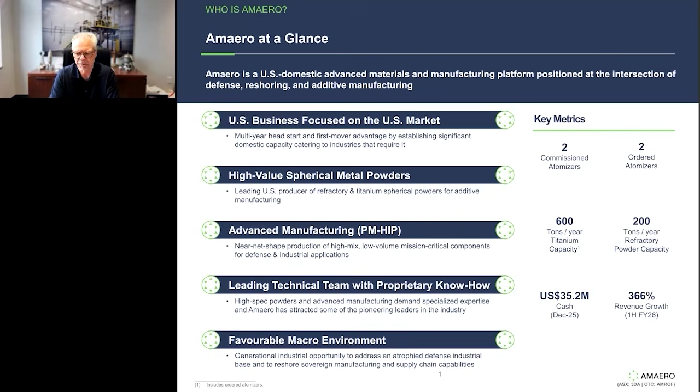And we also have pioneering experience in PM-HIP manufacturing of near net shaped parts. A very important capability that is relieving strain in the large castings and large forgings ecosystem. As you will see, we have assembled a leading technical team in the US, have significant proprietary know-how, and again, have very favorable thematic tailwinds that are behind us.

A bit about the overview of the business, again, both on the advanced materials side and the advanced manufacturing side. Advanced materials, as many of you may well know, 3D printing or additive manufacturing. The source, if you will, the feedstock is powder. Think of this as the ink cartridge in your HP printer. Again, the spherical powders are the cartridge, if you will, or the input that is used in additive manufacture or 3D printing.

About 80% of that powder market is what we would think of as commodity alloys, stainless steel, nickels, coppers, such as that. The top 20% of the market, lower volume, higher value, are refractory alloys, such as niobium, tungsten, tantalum, moly, zirconium, and then titanium. Titanium being the largest part of that market. That is exclusively where Amaero focuses.

We have the most advanced technology in the world, the next generation of an EIGA, or electrode induction gas atomizer. We have what's called the EIGA Premium. Significantly higher yield than the prior generation, uses less argon gas, which is the second largest consumable. And again, very, very high quality powder.

The two most accepted manners of atomization are plasma atomization, used by companies such as AP&C and Tekna, and gas atomization, used by companies such as Amaero and the prior generation ATI in the US. These additive manufacturing or 3D printing applications are used extensively in defense, space, medical, and other industrial end markets.

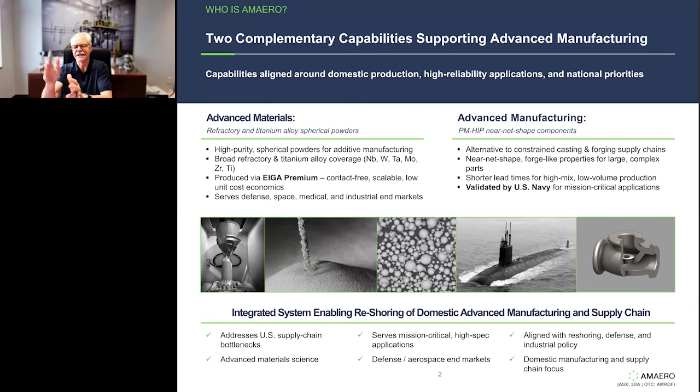We've worked very closely with the US Navy. You'll see in a bit validation of that via a letter from the US Navy, as well as an event that was convened at Amaero back in December. And PM-HIP is particularly well suited for what we call high mix, low volume production. So if you've got a single part of which 1,000 will be manufactured, it makes sense to invest in investment tooling and so forth. But if you've got a part of which you might only need a dozen in a single year, but again, mission critical, high value parts, PM-HIP is fantastic for that type of application.

Very interesting leadership team. One of the things that is unique about Amaero, I'm an engineer by background. I've spent my entire career in private equity and finance. My private equity firm Pegasus owns about 30% of Amaero. I have personally funded about half of that position. Again, very unique alignment of interest with our other shareholders. We own 288 million shares of Amaero.

Every single share of that stock was paid for alongside other investors in placements or on-market or off-market activity. Very different than, candidly, I see with many ASX companies where CEOs or management are given significant stock in the way of performance rights or other grants. Again, in this case, all of our shares were paid for alongside other investors. We've assembled the leading technical team in the U.S. Thus, the reason we work so closely with U.S.

...labs and other defense primes and counterparts in the U.S. As I mentioned, we're now in a fully built out 100,000 square foot facility near Chattanooga. We fully commissioned our equipment, and just this year we have begun scaling from a commercial standpoint. I'll move somewhat quickly through these early slides, and then towards the back of the presentation, focus a bit more on the business in its current state, growth opportunities, and a business update.

Significant thematic tailwinds, and these are primarily twofold. Those of you that follow the U.S. market, as you know, there is a significant uptick in spending on the defense industrial base. Prior to the current Trump administration, the U.S. was spending at a trough level, as a percent of GDP, on defense since the Second World War. The same was true with our NATO allies.

We've seen a significant uptick in U.S. spending as a percent of GDP. And as you're well aware, our NATO allies have also committed to spend much more on defense. This has resulted in expansion of, candidly, what were already atrophied defense industrial base capabilities, where we're having to significantly address resiliency issues in the U.S., single point of failure issues in the U.S., and scale this capability.

At the very same time, on the right-hand side of this page, the Trump administration has had significant policy initiatives aimed at attracting the reshoring of sovereign manufacturing and supply chain capabilities. You've seen in the news companies such as Apple, NVIDIA, the chip manufacturers, medical companies, and so forth, that are trying to better align their manufacturing and supply chain footprint with their end market, the end market being primarily focused in the US.

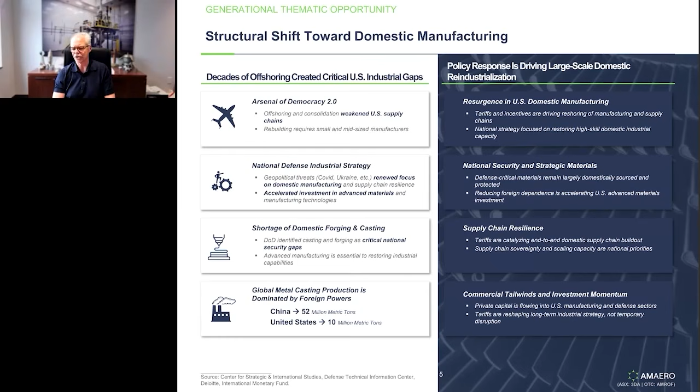This is driving significant interest by large multinational companies, particularly US-based multinationals, that are bringing that manufacturing and supply chain back home. And this has been a significant tailwind for Amaero. Amaero's entire corporate strategy has been driven by addressing demand pull or key vulnerabilities in the supply chain. In many cases, either we are a sole supplier or we have but one or two primary competitors.

On the titanium side, we have two primary competitors, both of which use what's called plasma atomization, both of which happen to be based in Canada, AP&C and Tekna, and that is it. So again, very limited competition on the refractory and the titanium spherical powder side of our business.

Why additive manufacturing? I suspect this is known to many of you, but if you look at traditional legacy manufacturing, whether that's machining parts, castings, forgings, one of the real benefits of additive is this thing known as a buy to fly ratio. So if you were to machine a 1 kilogram part, you might need to buy 20 kilograms of material. That is a buy to fly ratio of 20 times, given all the waste and scrap as you machine and process that part. In the case of additive manufacturing, the buy to fly is about 1.05 times. So very little waste, much more efficient use of material. This is particularly important for these more expensive materials.

Likewise, reduced time to production. An amazing statistic: SpaceX, as many of you will know, currently is launching about once a month. On average, between launches, they are making about 20 design changes. This is only enabled because they print a lot of their parts. You can change your CAD or design file, in turn change your print, and quickly iterate these design changes.

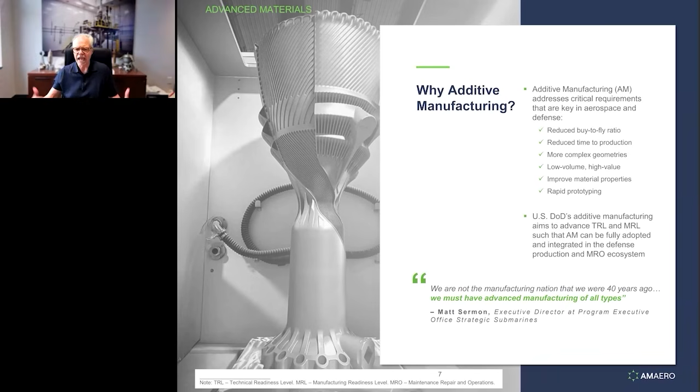Likewise, this makes for lower volume, higher value parts. Think about rocket thrusters, nozzles, and so forth. Again, back to the case of SpaceX. You've got advanced TRL and MRL, or technical readiness level, manufacturing readiness level. And as Matt Sermon, who heads up the program executive for the submarine industrial base, notes, this is significant. And now we've begun to move additive from prototyping work into production.

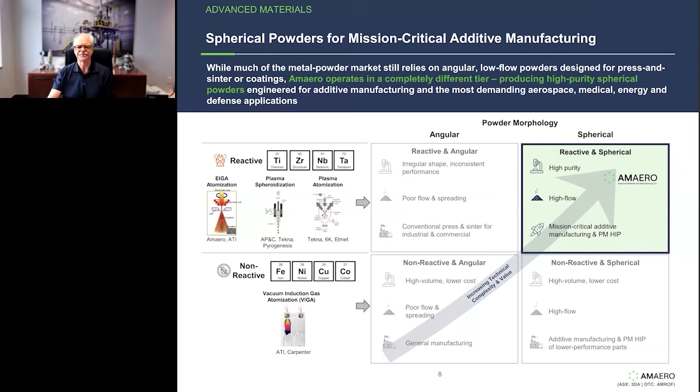Again, very important. Where we sit, as I described before, is spherical powder as opposed to lower value angular powder, an important distinction. And we are dealing with reactive metals such as the refractory and titanium metals, as opposed to the more commodity non-reactive side. So spherical powder, reactive powder, highest value within the powder supply chain. Albeit we purchased our atomizer, the EIGA Premium, from a company in Germany called ALD, we have very significant proprietary know-how.

On the left, what you see is the powder that was produced when we accepted our atomizer from ALD, and they would tell you this was the best titanium powder they'd ever printed. On the right, you see our commercially viable powder. This is after making modifications both to the atomizer itself, as well as significant parameter improvements on our team.

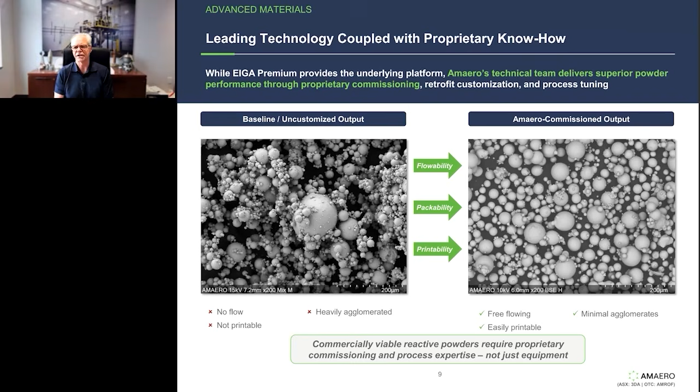As I mentioned, Fred Yolton, who invented gas atomization of titanium 35 years ago, and Eric Bono, who's worked with him for 30 years. So very significant proprietary know-how on our team. The same is true on PM HIP manufacturing, where our team has done a lot of the key pioneering work over the last 2 decades.

On the PM HIP side, the real challenge that we have now is in forgings and castings. One of Matt's favorite charts, who I mentioned again is quoted on the bottom of this page, is a chart that shows the lower 48 of the US, and it's aligned with 48 nodes. His point is, my average part for the Navy takes me 28 months to manufacture. 19 of those months it's waiting in queue, and it's traveling 48 places in the US for various processes. We've got to find a way to shorten that production process.

PM HIP, again, you'll see a letter here momentarily from the Navy, is one of the only mature technologies that can be immediately inserted, and that we can qualify parts for nuclear submarines with this technology. So again, a significant advancement there. These are very, very large parts, far too large to be printed, by way of example. And so you're talking about parts that are 5 tons, 10 tons. Again, much, much larger parts.

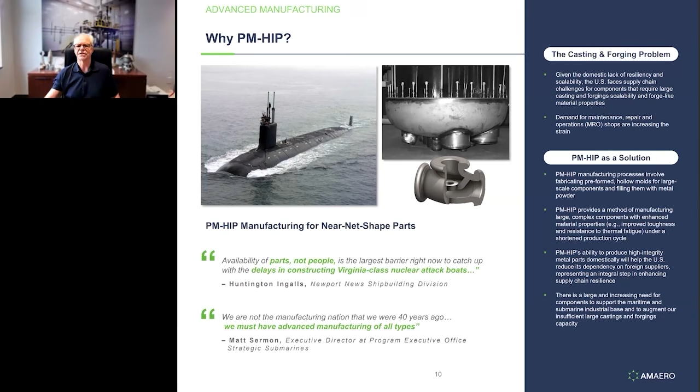And you can think about various industries, whether it is the maritime industry, whether it is nuclear energy. Obviously, nuclear energy is very important in the US. We all talk about AI. AI is driving the data centers. Data centers require a lot of energy. And so you're seeing nuclear modular reactors and other things being advanced in the US. And again, PM HIP is a great technology for that.

In particular for PM HIP, where it's the right choice is where you have very long lead times for forgings. You do get material properties that are forging-like, so much higher material properties than castings. Again, large parts where you typically would have excessive machine waste. So these are ideal parts for PM HIP. And as I said, these can be very, very large, commonly 10 tons, and very large in size, up to about 60 inches in diameter.

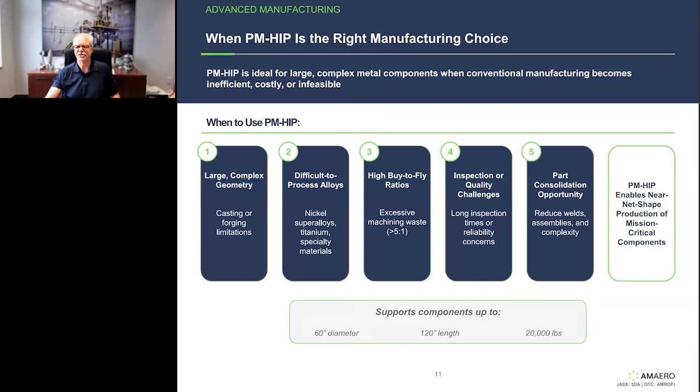This gives you a sense of where we sit. We've got proprietary know-how from the very beginning. So a very advanced numerical model that is used to design the can or the canister, essentially the mold. These molds are then filled with powder, outgassed. We then send these away to be HIP, hot isostatic pressed. So you're putting this under very high temperature, very high pressure. And then in turn, from the near net shape, you've got final machining that is done to get to the end part.

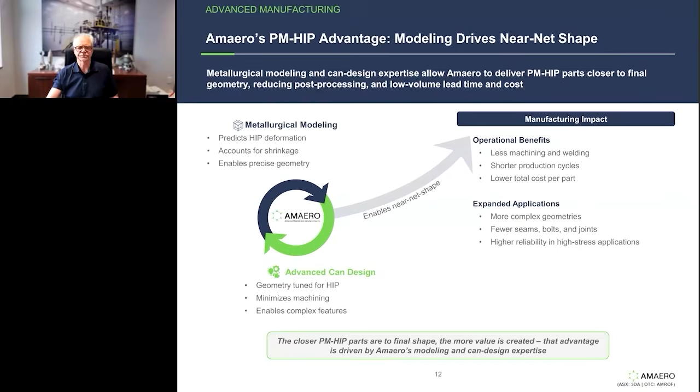Validation on the PM HIP side, again, we have leading pioneering experience on our team. I would expect over time about 60% of our business will be on the material or the powder side of our business, but a significant portion, about 40% of our business, will be the manufacturing side of our business. So quite unique. You think about other ASX companies, they tend to either be materials or machining, that is manufacturing. Again, we've got this very unique capability in both, and yet they're highly related and synergistic.

Talked about the know-how on our team. We were essentially in stealth mode, working with the US Navy for about 18 months on an active collaboration. We finished that project October of last year, with significant acceptance of that. And by the way, other companies had not been successful achieving those parameters that had been established by the U.S. Navy.

In turn, the U.S. Navy convened a meeting in early December at Amaero. That meeting included the two shipbuilders, NAVSEA, Naval Reactors, Naval Nuclear Labs, BPMI, which is the prime contractor for all things nuclear. And essentially that work was laid out to these various supply chains, the progress that we've made.

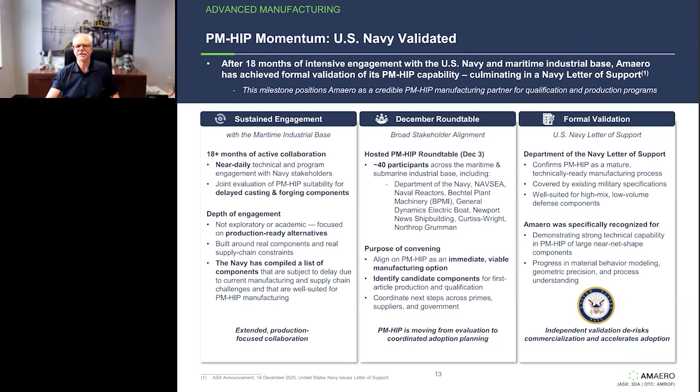Shortly thereafter, the U.S. Navy, highly unusual, issued a letter supporting PM HIP as a mature technology that can address the challenges that we have in the forgings and the castings ecosystem, endorsing Amaero and the work that we've done in our technical proficiency, and encouraging us to identify parts that can be moved towards qualification, and again, further relieving the challenges that we have in the forgings and the castings ecosystem.

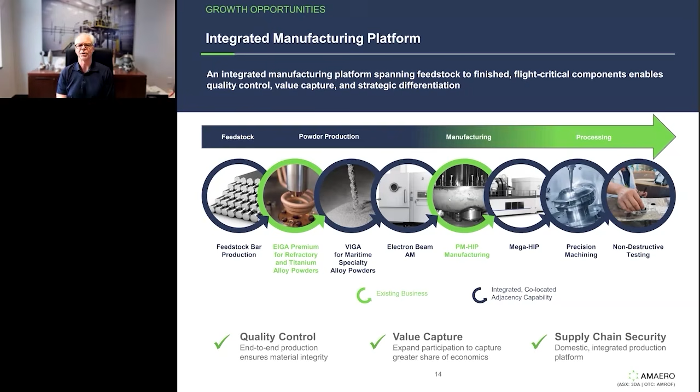Gives you a sense of where we sit today. Today, our primary capabilities are on producing refractory and titanium powder and PM-HIP manufacturing. Over time, what you would expect is we will look at expanding our business to include these adjacency capabilities. Back to the challenge the Navy has identified, as these parts travel all over the country. And so we've got a real opportunity to continue to build out a more integrated capability at Amaero.

I talked earlier about some of the important long-term strategic agreements that we have with ADDMAN, again, Castheon being at the forefront of work that has been done with Dr. Youping Gao on printing not only C103, but other very high-value refractory alloys. These refractory alloys, think about niobium alloys that are used in high-temperature applications such as hypersonic weapons, strategic missiles. Think about tungsten that is used in munitions, zirconium that is used in nuclear applications, moly, other high-temperature applications. So really, really interesting if you think about the thematic opportunities in hypersonic weapons and strategic missiles. Think about space applications, again, very, very high temperature.

In the case of LO3D, as I mentioned, the only made in USA equipment OEM for 3D printing. Again, a 5-year exclusive relationship there on the refractory and titanium powder side. Titomic, a leader in cold spray, some very interesting applications as they move to advance not only from repair and maintenance, but qualifying in parts. Some of the interesting opportunities here include titanium pressure vessels, as well as using refractory alloys on thermal protection systems. To qualify those parts, the defense primes are requiring spherical powder. So again, a very interesting exclusive supply agreement there.